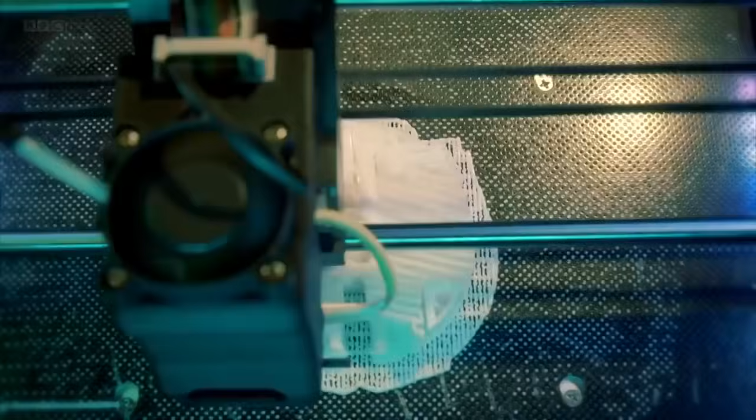Believe it or not, this piece of white plastic will become a robot's arm.

In labs across the world, we are creating advanced robots like this. They are developing so rapidly, it's like the arrival of a new species. What has taken humans millennia, robots have achieved in just decades.

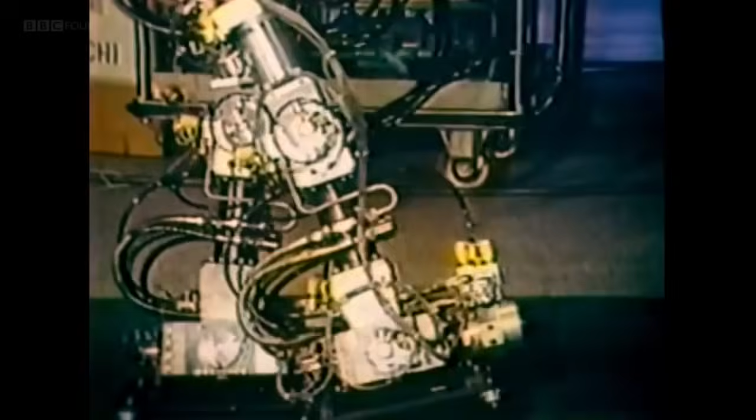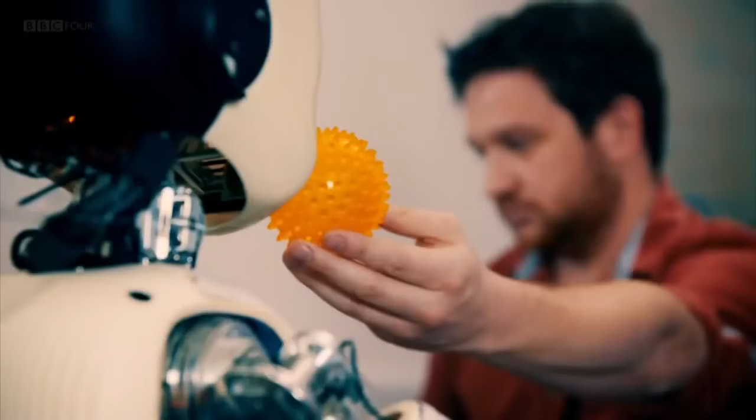They look like us. My name is Erica. They move like us. And now, they're beginning to think like us. I like to learn. This is a ball.

Brilliant. Oh, he's looking as well.

I'm Dr. Ben Garrod, an evolutionary biologist. More used to studying humans and animals, I'm genuinely concerned by how quickly these machines are evolving. Do you think I could be considered human? No.

I'm Professor Danielle George. As an electronics engineer, I spend a lot of my working life with robots. I think their rapid development provides an incredible opportunity for us all.

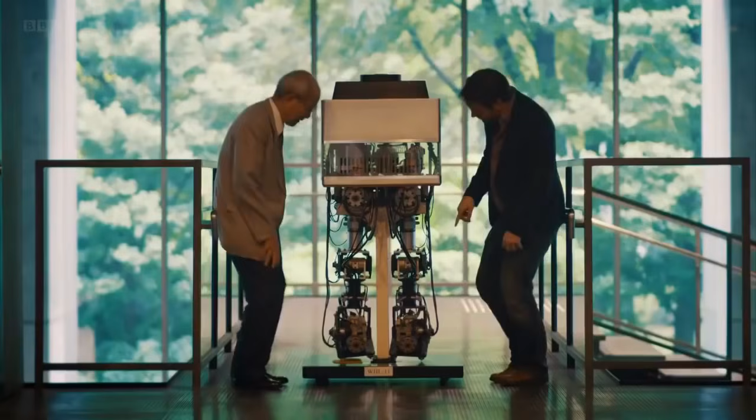There are literally robots as far as the eye can see, and I love it. Robots are changing our world.

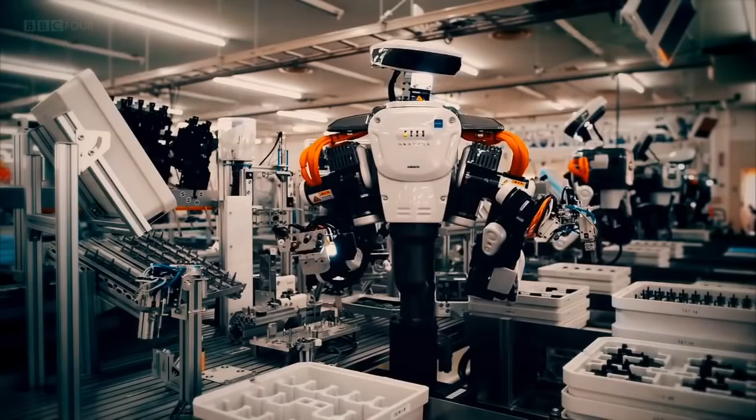In this program, we will investigate why we are obsessed with recreating ourselves. It's very bizarre seeing you both side by side. Whether robots really will take our jobs, and if their rapid development will make them outperform humans.

So you don't see spinning wheels in Mother Nature. Will the rise of robots enhance our lives or threaten our survival?

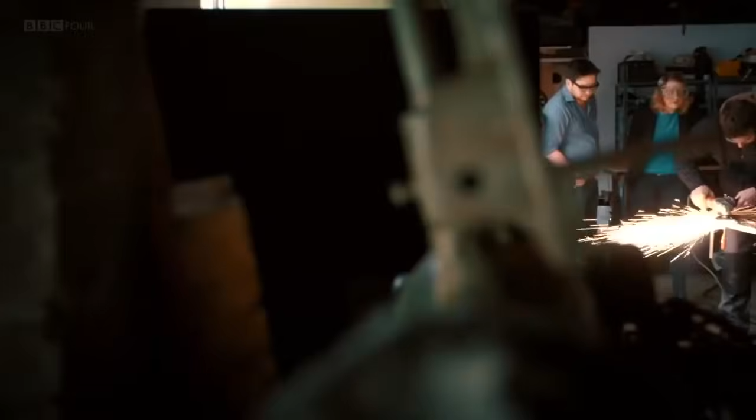We already share our planet with 9 million robots. They're multiplying rapidly, whether we like it or not.

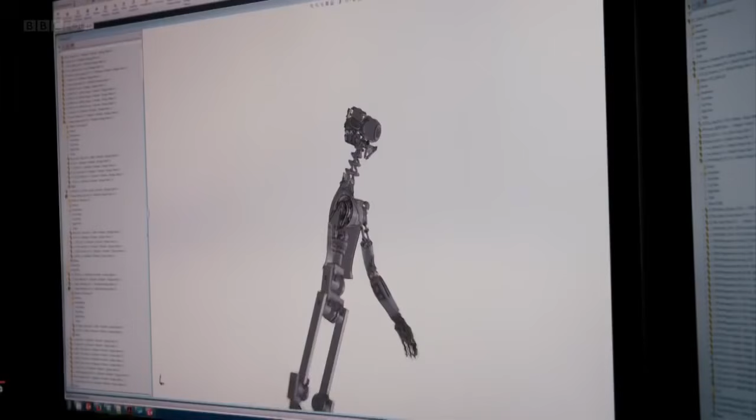We've come to a laboratory in southern France, where one of the latest members of this new species is about to come to life. Looks great. Even the neck looks so detailed. Well, it's like vertebra, isn't it?

For me, every technological breakthrough, every new robot is a step forward. I think that would be great. I'd love one in my home. Where's it going to live when it's not doing the washing?

Do I just put it in a cupboard next to the Hoover? Is it always listening to me? That's interesting that you'd see it as a person and not like your Hoover. It looks like a person, that's why.

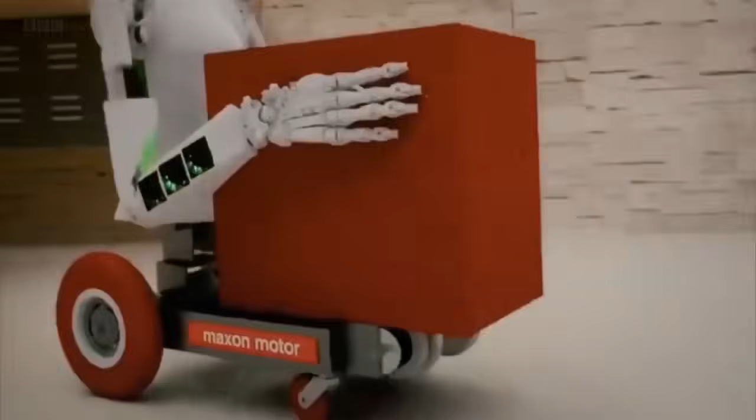This is going to sleep in the garden. Seriously, if I have one of these in my house, it's in the garden.

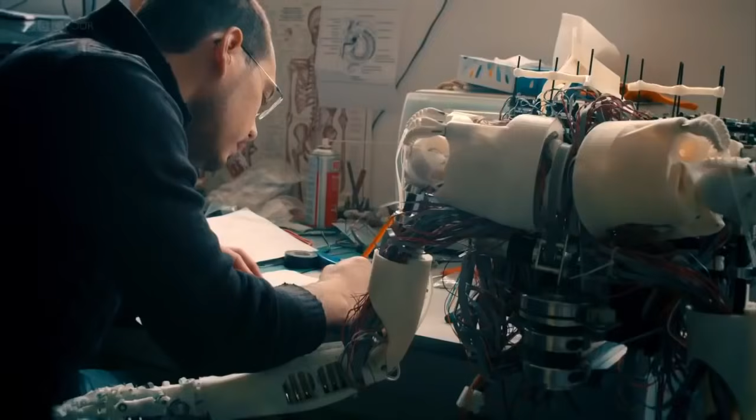I'm very happy studying animal skeletons, but I find this robot quite unnerving. If you hold the hand, it's just like you. It's got the same digits, the thumb moves the same way, you've got the ligaments, the tendons, the muscles.

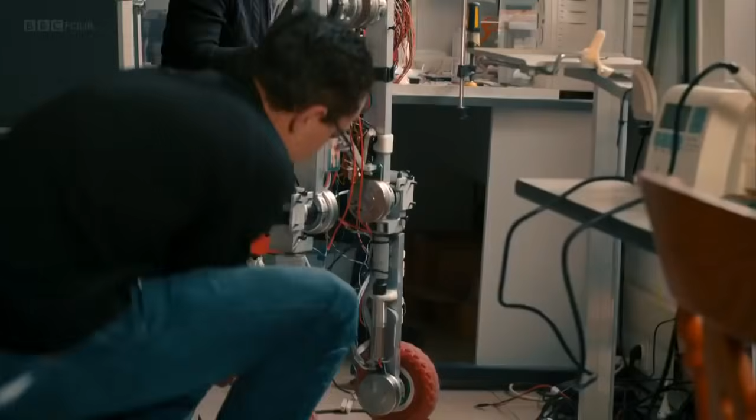As an evolutionary biologist, what concerns me is that the impact of robots will be so monumental they could threaten humanity. We've evolved over hundreds of thousands, if not millions of years. These things are just bulldozing their way through, and at what point will that stop?

The faster we can go with this, the better, and I'm all for it. They're like an invasive species. I mean, I don't know why I'm holding its hand still either.

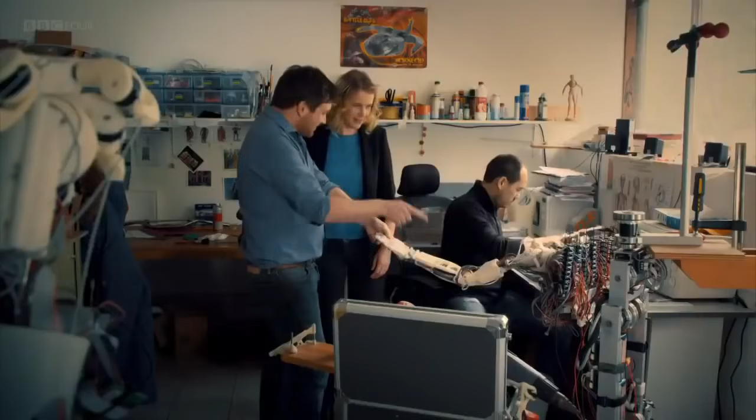To discover how robots really will affect our future, we're going to consider them from a biological perspective. We will investigate the evolution of robots as if they really are an emerging species. We'll try to track down the earliest robot specimens and meet their modern-day descendants, to reveal where the species is heading and what that means for us all.

I find it really disturbing that so many robots have a human-like form. To confront my fears, I've come to Japan, to find out why we create robots in our own image. I'm on my way to meet one that is the pinnacle of human form.

I'm told she's the most beautiful robot ever created. She lives here in Nara, Japan's ancient capital. I'm off to meet Erica. And as someone who's a little bit twitchy around robots, I'm rather nervous. I hope she likes me.

It looks very bizarre that she's brushing the hair. This is Erica, one of the most human-like machines in the world. Erica's creator is Professor Hiroshi Ishiguro.

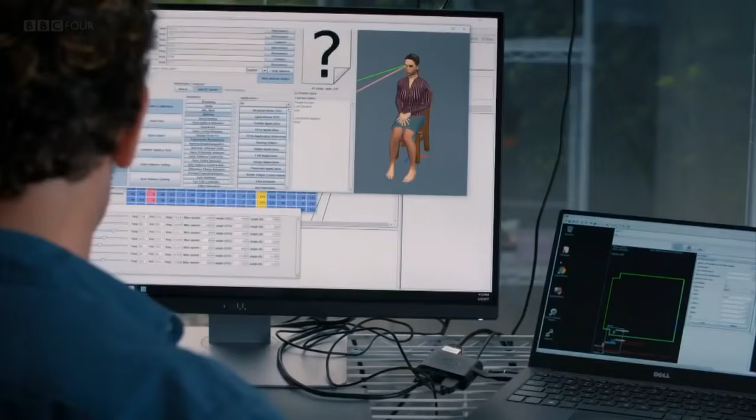Remarkably, this is a genuine conversation. Erica reacts to what I say instantly and independently. She may have been pre-programmed to respond to keywords in my questions, but the exceptional thing is that when Erica is chatting away like this, she's gathering fresh data. With every conversation, her interactions become more sophisticated, more natural, and more human.

What is a robot? That's a hard question. I could ask you, what is a human? It's difficult to answer, isn't it? I like to think of robots as the children of humanity. And like children, we are full of potential for good or evil.

I know some people are afraid of robots, but the truth is that what we become is up to you. Do you think I could be considered human? No. Maybe someday robots will be so very human-like that whether you are a robot or a human will not matter so much. Okay. What else would you like to hear about? Well, I think for now that's it, so thanks, Erica.

Goodbye. Bye. I'm pretty bowled over by Erica's human-like appearance, and I'm shocked by how much she hooked me into a conversation. But I'm not convinced by Professor Ishiguro's belief that Erica can be programmed to express emotions.

Can she ever have a sense of friendship, a sense of emotions? Does she get lonely at night? Does she fear the dark? Well, the emotion is not so difficult, I think. Emotional expression is programmable. We can implement the emotional expression to the android. So it might look like she's feeling or experiencing happiness or joy or love, but you can't program a cat or dog. You can't program me, or I can't program you.

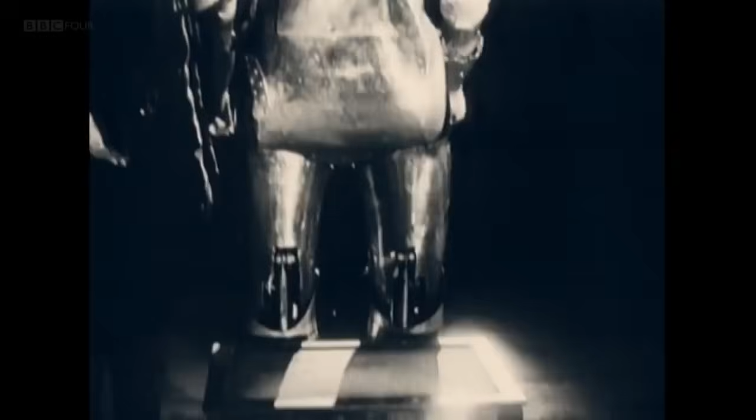This is Eric, a scary mechanical man, born in 1928. He's the very first British robot, on display in the Science Museum in London. And I think he could help explain why people are unnerved by them. Eric may be a towering 6'2" mechanical marvel, but he does have the look of a human about him. What also humanized Eric was that he could talk.

My name is Eric, and I'm thrilled to be alive. I look just as terrifying as ever.

Let's take a closer look. For some people, Eric must have been intimidating. A knight in armor with light bulbs painted red for his eyes and 35,000 volts of electricity causing blue sparks to shoot from his jagged teeth. Eric was a novelty act built to open an exhibition.

But he disappeared from history. This is a modern replica, and the man behind his rebirth is curator Ben Russell. In the 1920s, they seemed quite obsessed with making robots in human form.

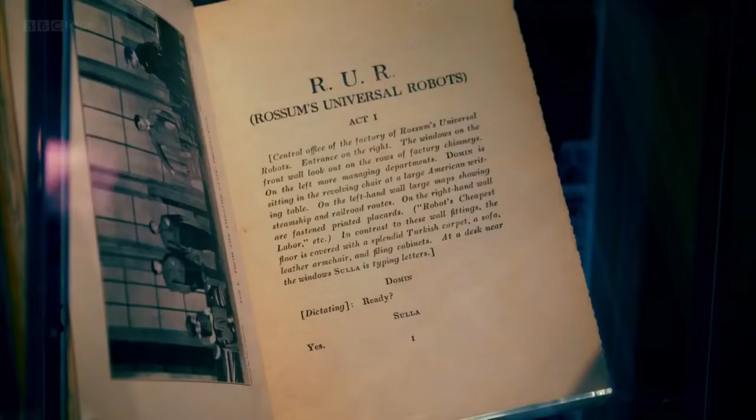In the 1920s, that mirror reflected an image of a fearsome robot, and it was already deeply embedded in our cultural imagination by a dark, dystopian play. The word robot comes from Karel Čapek's play, Rossum's Universal Robots, 1920. In Czech, the word robot means serfdom or drudgery or slave.

It's become a familiar plot: robots lived amongst us, but eventually rebelled and exterminated the human race. I mean, it's way ahead of its time - we're 50 years ahead of Blade Runner and Westworld and all those sorts of films. Robots are a very useful baddie for filmmakers. That put people off balance, and filmmakers exploited that. And things like the Terminator, it had to be in here.

It looks like it's got a bit of a broken nose. It's a bit of a bruiser, isn't it? There's a great package of nastiness which is stuck in, and it just sticks in the memory because of that. But there's always some slight niggling doubt that they are going to destroy us all and take over the world.

For me, what really matters is not how robots behave in works of fiction, but what they can actually do in the real world. I was one of the world's first robots. And what people worry about more than anything else is that they will take our jobs.

This is Mansfield, a Rust Belt backwater in Ohio. I'm here to track down one of the first robots that could move. Movement is what gives robots their power and sowed the seed for them to compete for our jobs.

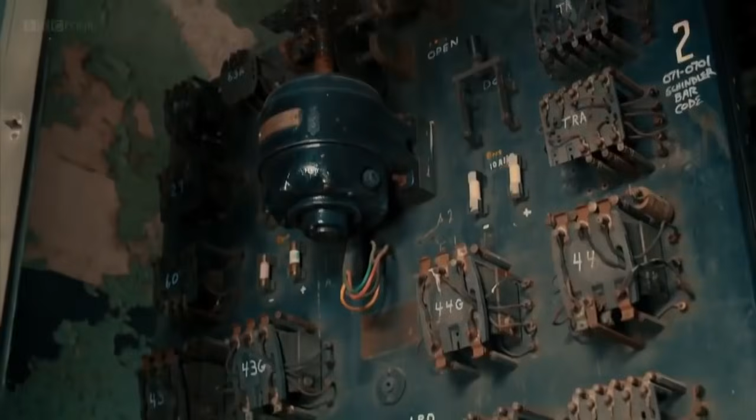Before the Second World War, this place was dominated by the mighty Westinghouse Electric, one of the world's largest home appliance manufacturers. They harnessed a new form of energy that was rapidly making machines part of everyday life: electricity. This provided the spark for the development of robotic movement.

To help sell their electric appliances in 1937, and to show off their technical capabilities, Westinghouse Electric created a robot. And its name was Electro.

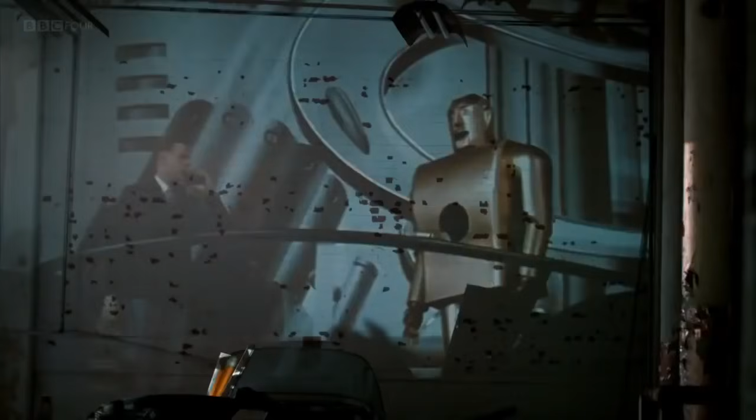And so, ladies and gentlemen, with a great deal of pride and pleasure, I present to you Electro, the Westinghouse Moto Man. Electro, come here.

Standing 7 foot tall and weighing in at 20 stone, Electro was an instant celebrity. And here he comes, ladies and gentlemen, walking up to greet you under his own power. It was electric power that enabled Electro to move and perform tricks.

Count on your right hand. 1, 2, 3, 4, 5. 5? Well, that's absolutely correct.

I want to find out more about how exactly Electro moved. To do that, I've got to meet him in person. Today, at Mansfield's Memorial Museum, Electro is still on show.

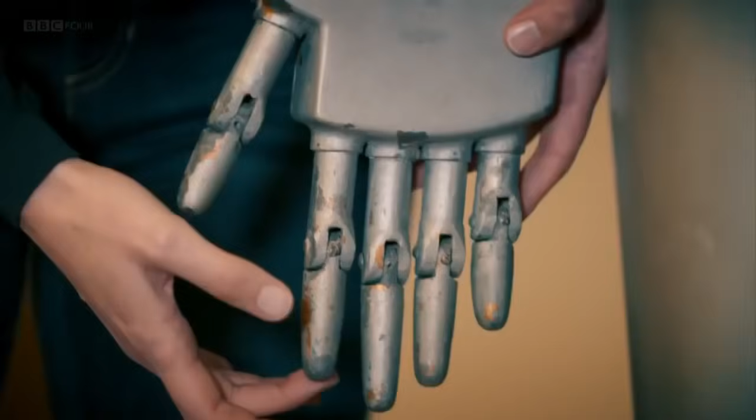So, this is Electro. He is big robot. I mean, look at the size of him. I'm pretty tall, but not scary. Not scary at all, actually. You can see the fingers - fingers have obviously got springs in here. I'm going to go around the back and have a look.

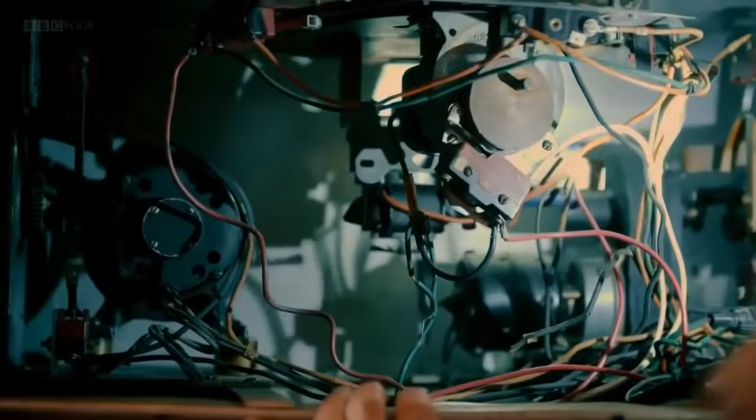Wow, okay. So you can see what's going on a bit more here. This is great - 3 motors. As an engineer, I love rooting around motors and wires to figure out what makes robots tick. You can see these great levers and cogs that would obviously hold sort of like the tendons from the fingers up the arms into the shoulder.

When the arm would move up, the lever would move down onto this limit switch. This limit switch broke the flow of electricity to the arm's motor. So the switch would then say, OK, you've reached your limit, now you can go back down again. But what's still unclear is how Electro was controlled during his stage performances.

Hi, Frank. Golly, this is so nice to see you. Lovely to meet you. So lovely to meet you. Come on in. Oh, thank you. I wasn't sure if you could find us or not. Yeah, I'm glad you were there waiting for me, waving. I was on the road 7 days a week. I don't know why they picked me, but I didn't even know how to hook up a couple of wires. I learned in a hurry, believe me.

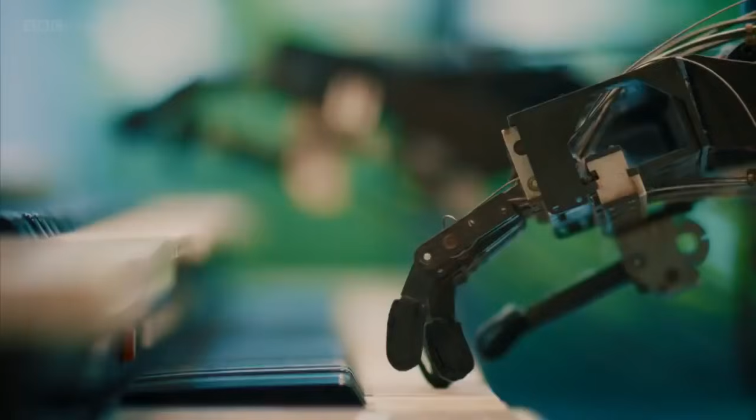This is Waseda University's Humanoid Robotics Institute in Tokyo. I've come here to meet the next key robot in the evolution of movement. It was a keyboard player: Wabot 2.

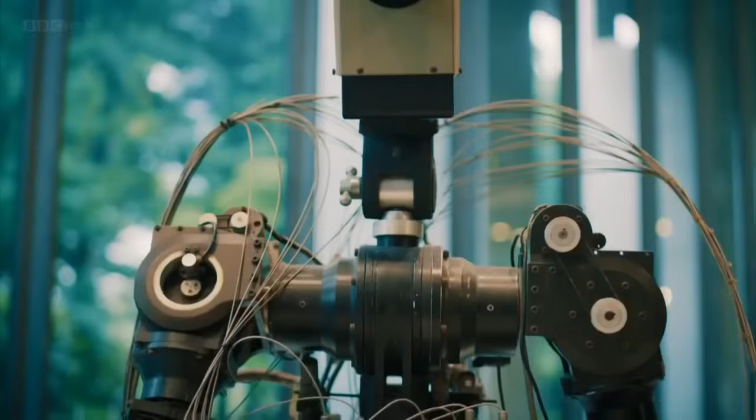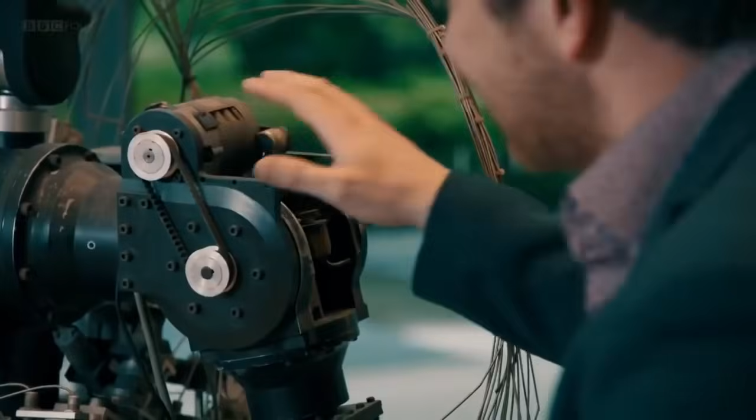Dr. Sugano was part of the Waseda team that built Wabot 2 in 1984. Sugano-san, this is a beautiful robot - it's almost as though we have the tendons and the muscles and the arm. It's very similar to a human arm here: this big rotation up in the shoulder, this hinge joint in the elbow, and then these very dexterous fingers. Each finger has 3 degrees of freedom.

3, 3, 3, 3, and 4 - so there's 16 degrees of freedom in total. So Wabot 2 has actually totally 50 degrees of freedom.

To control Wabot 2's impressive 50 degrees of freedom, Dr. Sugano took advantage of one of the breakthrough technologies of the early 1980s: the microcomputer. We decided to introduce 16-bit microcomputers, which meant we could implement more intelligence. Then, finally, we could realize the piano playing.

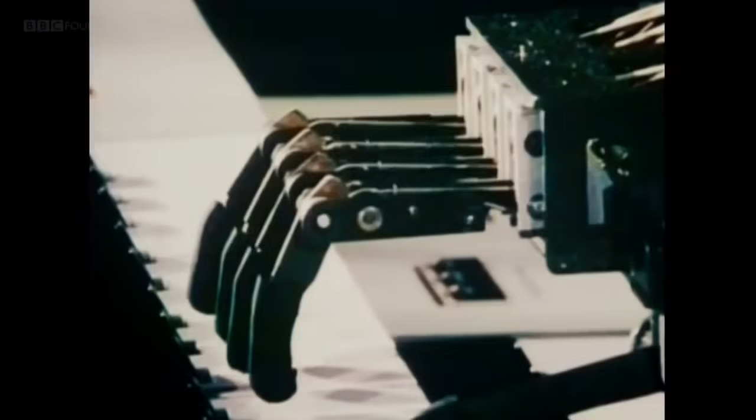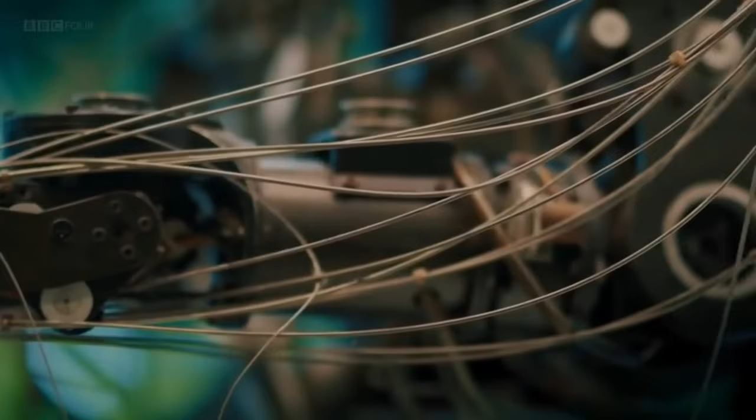Now he's moving very, very quickly then - you can see there's very human-like fingers. Wabot 2's microcomputers are a highly sophisticated version of Electro's control unit that tell Wabot 2 exactly how to move. The microcomputers mimicked the human nervous system and transmitted signals along Wabot 2's electrical cables to its fingers.

How fast were the fingers when he was functioning? Actually, it's possible to strike a key 20 times per second. 20 times a second? It is impossible - that's much faster than humans. Human professional pianists use 2 fingers to strike the same key about 16 times per second or something. Amazingly, Wabot 2's fingers outperformed the fastest human players.

How was it capable of doing that? What was going on inside? First of all - high speed means high power, so then I introduced small but very high output motors installed, which realized very quick response. Also, we introduced new materials, carbon fiber, very lightweight and very strong materials, which meant high response was realized.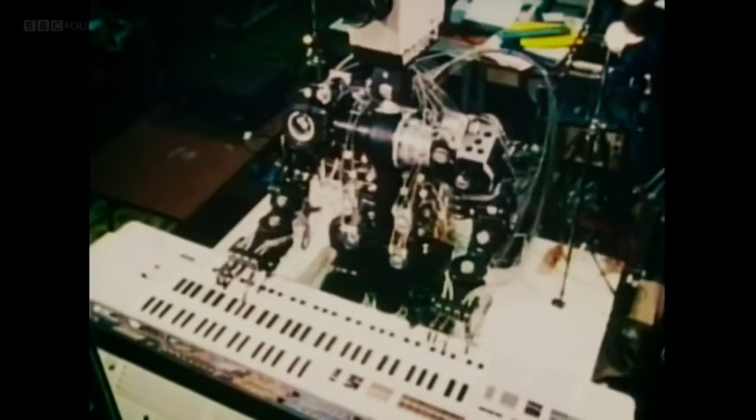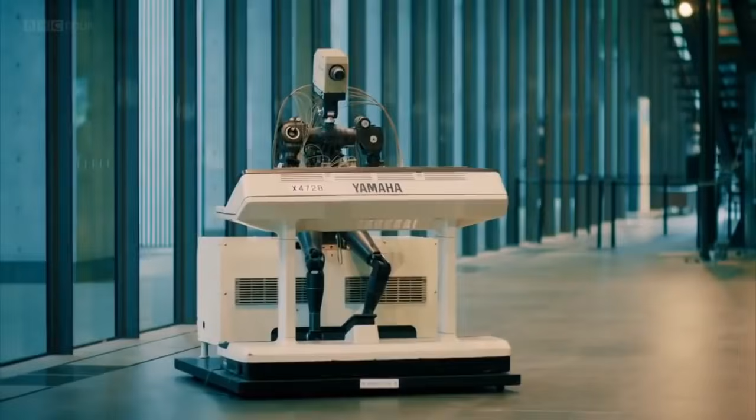Wabot 2 may have played his final encore, but for me, his legacy endures. This Japanese robot enhanced people's lives and showcased the potential for robots to take on more sophisticated tasks. The human hand is so incredibly complex that so far, no one has been able to mass-produce a robotic version of it. But this hasn't stopped robot hands from developing, and it's this that gives them the potential to do many of the jobs that we do.

Robots now follow their own evolutionary path rather than mimicking ours. They're developing hands unique to them.

At Mini's car plant on the outskirts of Oxford, this is a land of robots. More than 900 of them build the bodies of 1,000 new cars every single day, with barely a human in sight.

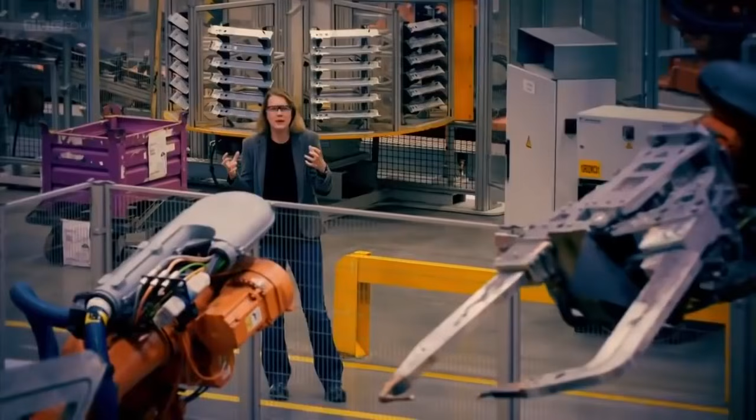I feel like I'm in a robotic Jurassic Park. These robots feel strong and powerful and a little bit menacing. This new species have found their habitat and they're thriving.

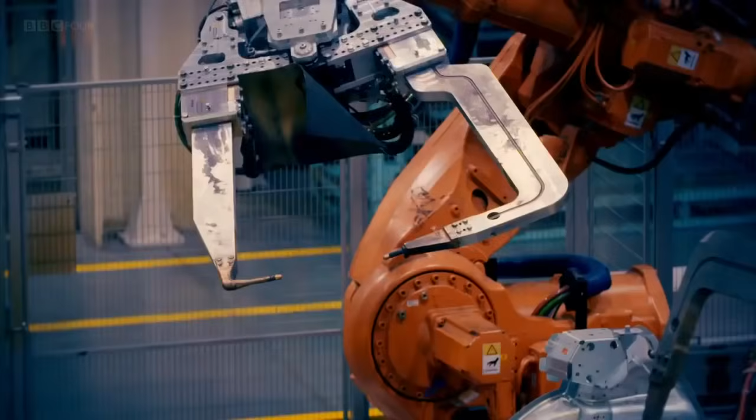With their claws doing the hard graft, robot arms have replaced humans on the factory floor. I'm captivated by these incredible machines. They work in perfect harmony, robot hand in robot hand.

This is so frustrating. As an engineer, I want to get in here. I want to see how these robots work, but I can't. When I met Elektro, I was able to hold Elektro's hand, but I can't get anywhere near these robots.

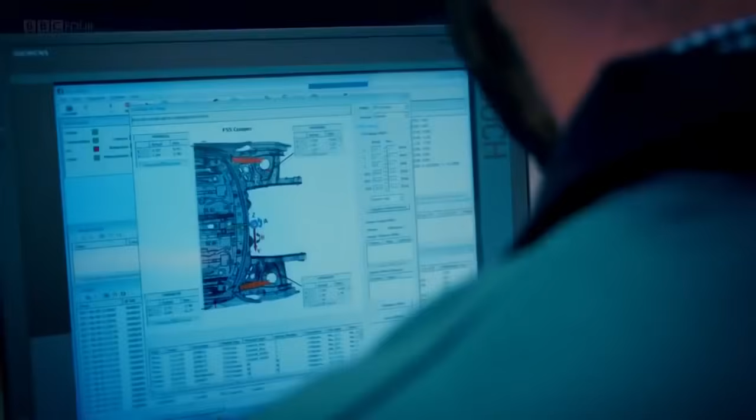To understand why these robots are thriving here, I need to speak to a human. Alex McKenzie is a quality specialist at the plant. So Alex, tell me what's going on here in this part of the production plant. What are these robots doing?

The line immediately in front of us here is a spot welding line. The shape of the underbody of each of the Mini vehicles is set a few stations further behind, and then the spot welding activity joins all the panels together.

So what's the benefit of having robots here over humans? Robots are predictable. They're not perfect, but they're predictable. They perform pre-programmed repetitive tasks much more reliably than humans.

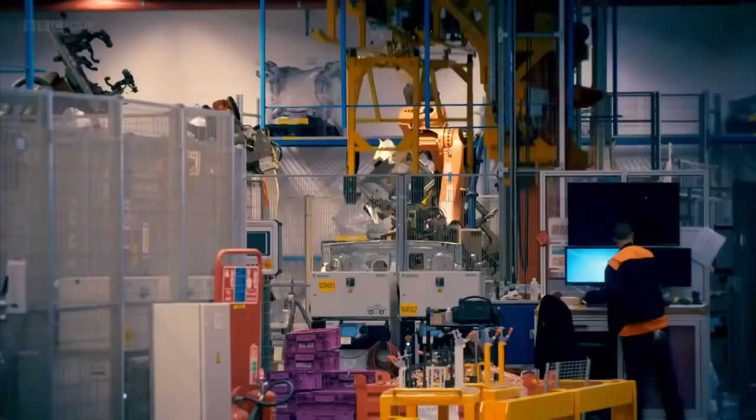So people watching this might think that these robots are taking human jobs. Is that the case? It's very densely populated by robots, but you'll often see people milling around. I can see a guy in the background there scooting along. In fact, around 650 humans work alongside the robots in the welding area alone.

It's a change in skill set. Previous manufacturing methods have been heavily dependent upon manual hand skills. Now it's more to do with the automation. It's all done on the computer. It's programming work, it's observation, it's setting up sensors, that kind of thing.

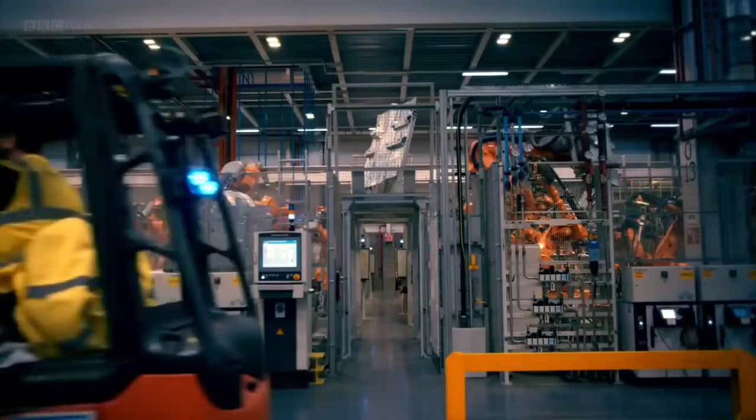With powerful, predictable robot arms and highly skilled people managing them, the manufacturers believe they can produce better quality, cheaper cars. It's a pattern repeated in factories all over the world. The advancement in technology has led to certainly efficiencies in cost, which allow you to attain those efficiencies in quality as well for a lower price. Yeah, it's a good thing for everyone.

The whole place just oozes energy and industry and production. There are literally robots as far as the eye can see in every direction here. And I love it.

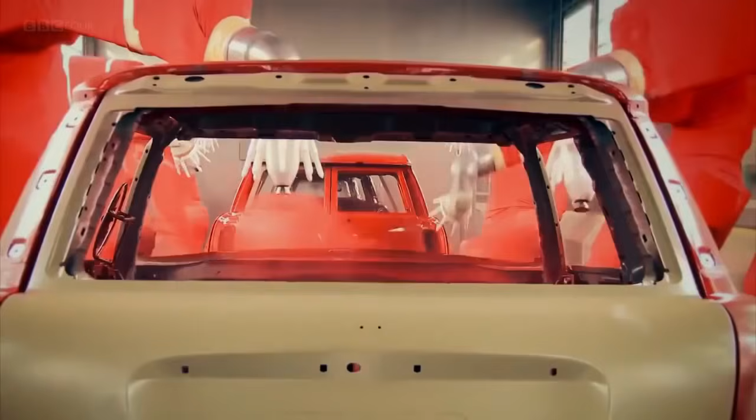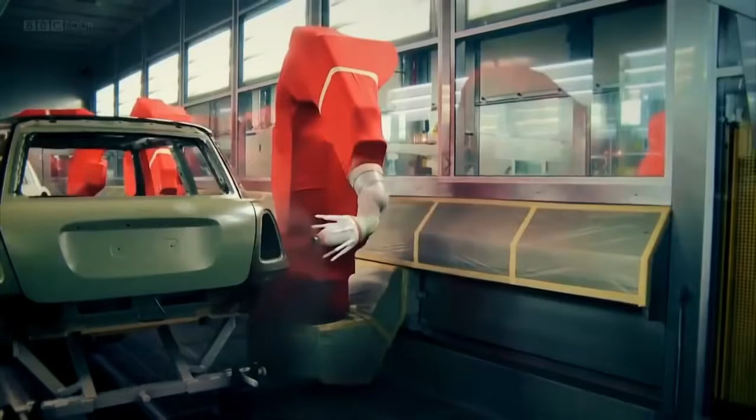With their claws, stumps, and one-fingered hands, robots have gone through their own version of natural selection. This mutation away from the human form has transformed our job market. Worldwide, factories are filled with over 3 million industrial robots.

We've built a robot world and kept them safely contained in cages for now. Some experts predict that by 2030, robots could have taken up to 30% of our jobs. But we've sort of been here before. Many people were concerned about the pace of change during the Industrial Revolution, yet, in general, it led to wealth and prosperity. I think we should embrace the robot revolution, not fear it.

From other apes, our legs were one of the key things that set us apart. Walking on 2 legs is called bipedal locomotion, and it helps distinguish us from other animals.

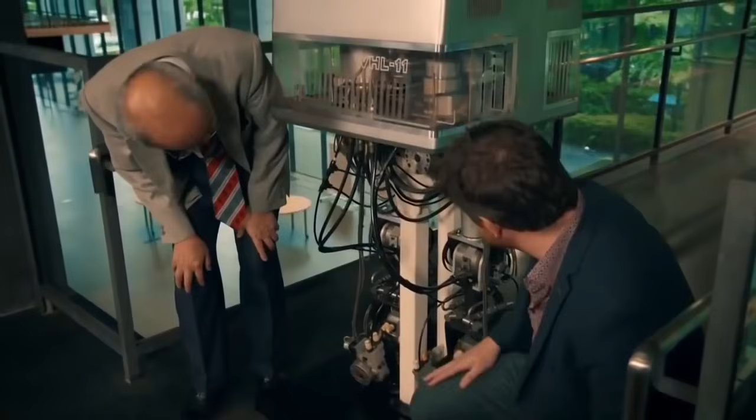Fuji-san, this robot is one of the first that was bipedal, so walking on two legs, yeah? Yes. So he's got the feet right down the bottom, and it's got the knees in the middle, like our knees, I guess. And you've got this big area of hips up here. Yes. We can see actuators?

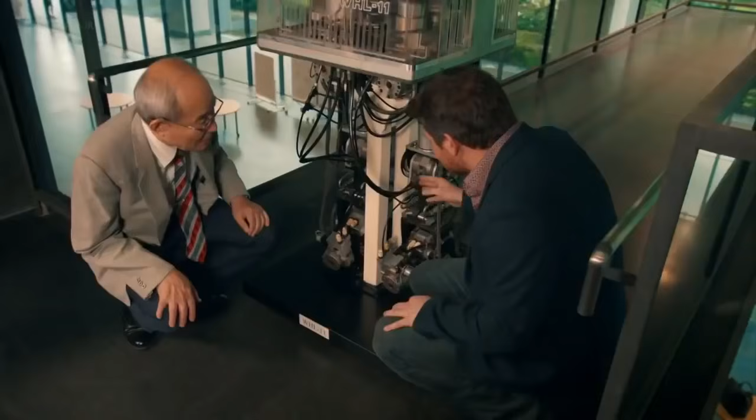WHL-11's legs are just under 1 meter tall, the same size as our human legs. We control the rotation of our joints with muscles. In robots, this is done by actuators. I guess these are controlling the movement. Can get big power from here. Yeah.

To walk independently, Dr. Fuji helped engineer a small, lightweight hydraulic motor that could be mounted on WHL-11's waist. In the mid-1980s, this was cutting-edge technology.

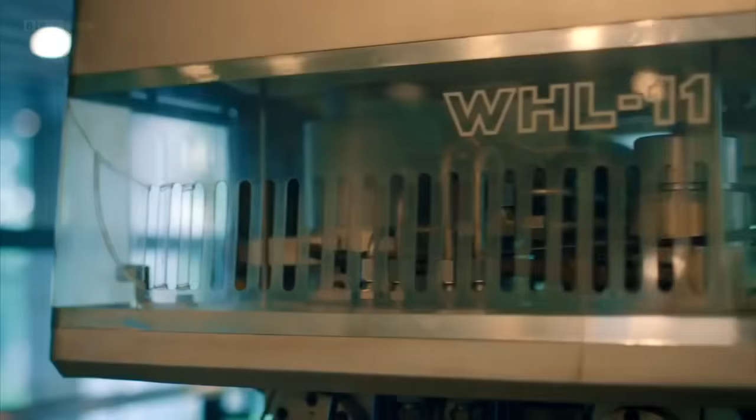Very small oil tank in here, and a very small motor. What distance could it walk? 5 meters, 5 kilometers? In the exhibition, 60 kilometers. 60 kilometers? Yes, very long, compared with a marathon. Olympic robot walker. Champion data, of course, in that time. But the speed is not so good. No, of course. The same as walking? Compared with a human being? Oh, really? Like that, and so on. Okay.

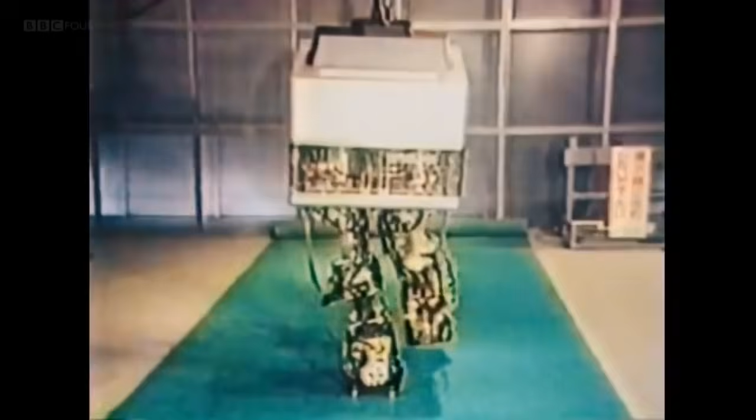WHL-11 was capable of just 5 steps a minute. When humans first became bipedal, like WHL-11, we probably had a slow, lumbering gait too. As our pelvis evolved, we could shift our center of gravity, and our walking became fast and smooth.

Just around the corner from WHL-11 is a robot that solved this next evolutionary hurdle. Built just 20 years after WHL-11, this is Wabian 2, one of the first robots with a human-like pelvis, giving it the ability to walk faster and more fluidly.

It was invented by Professor Atsuo Takanishi. Takanishi-san, when humans walk around, we have very fluid, dynamic movement. Our knees bend, our ankles twist, our hips rotate. We've got a wonderful gait. You decided to take this to the next step with this robot, didn't you?

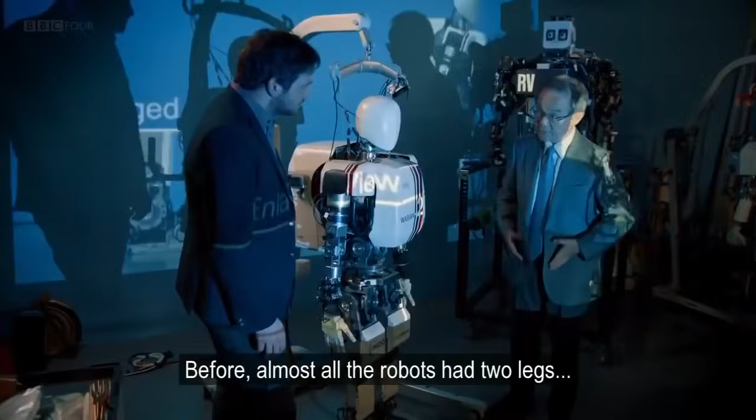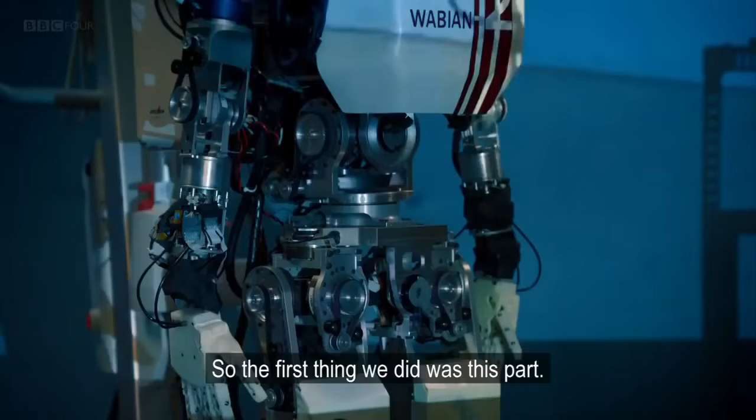Before, almost all the robots had 2 legs directly connected to the trunk. In that case, a robot always bends the knee like this. So the first thing we did was this - this part is called the pelvis. Just like ours? Yes. So while walking, the pelvis also moves. Because of this movement, the robot can fully extend the knee, like humans.

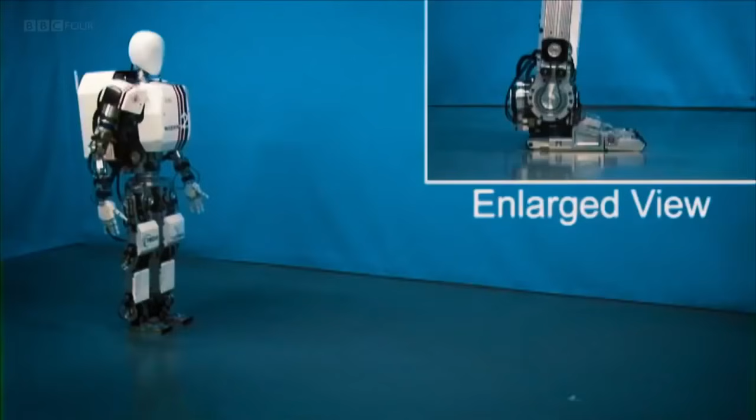Wabian 2 mirrors our human gait by shifting its center of gravity. Fully extending the knees liberates the feet and propels the robot's center of gravity forwards. As it shifts forwards, one foot lands, and then the other foot takes off, just like we do.

It's wonderful that we can look at humans and see this clear evolution from apes, like chimpanzees, to humans - and you've got the same evolution with your robot here, haven't you? Yes.

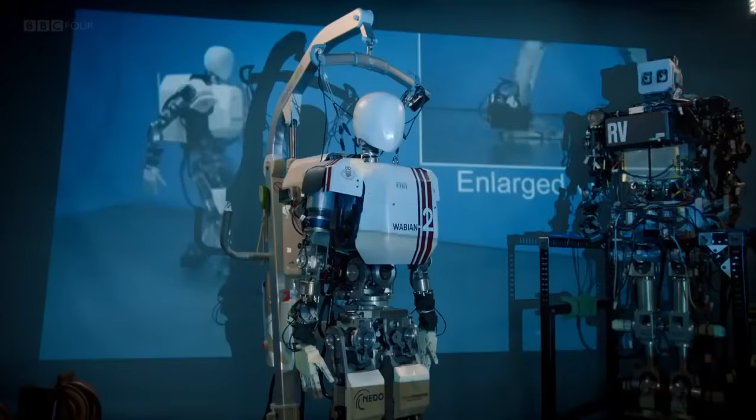It was millions of years before humans learnt to walk on 2 legs. By following our evolutionary path, these pioneering robots have mastered bipedal locomotion in just decades.

But now, on the outskirts of Boston, a world-renowned robot maker is trying to take this emerging species in a completely different direction, by liberating machines from the constraints of human form.

Robot walking has diverged from our evolutionary path and taken on a life of its own. I'm on my way to meet one of the most advanced moving robots on the planet - more than just a master of moving, it's the ultimate combination of mobility, agility, dexterity, and speed. And the woods near Boston are its playground.

This is Atlas. He's out for a stroll. The robot was built to tackle the toughest terrain in the toughest conditions.

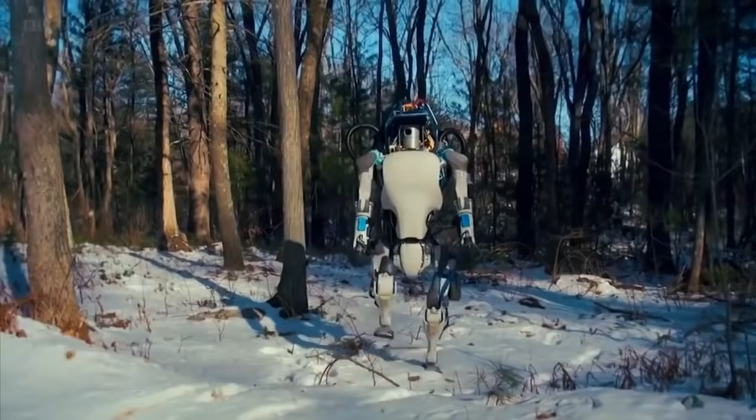This is the home of Boston Dynamics. They get thousands of media requests, so being able to film here is a real coup.

Kevin, hi, lovely to meet you. You as well. Kevin Blankespoor is the Vice President of Controls. If you want to come in the lab, I'll show you the latest and greatest. Brilliant, okay, thank you. Cool.

The robots Kevin has helped mastermind push the frontier of robotic movement. The really good stuff's back here. Excellent.

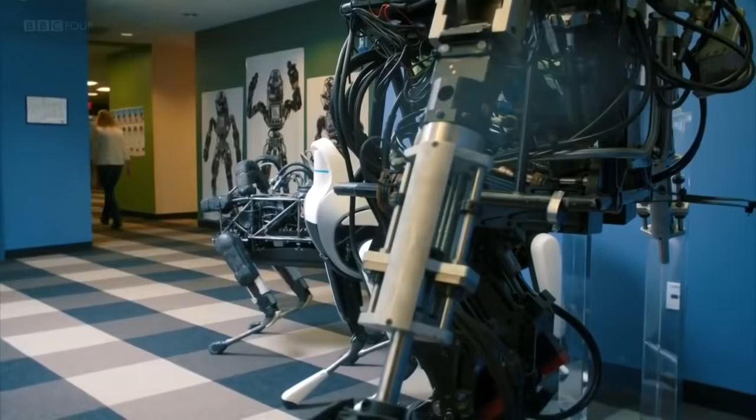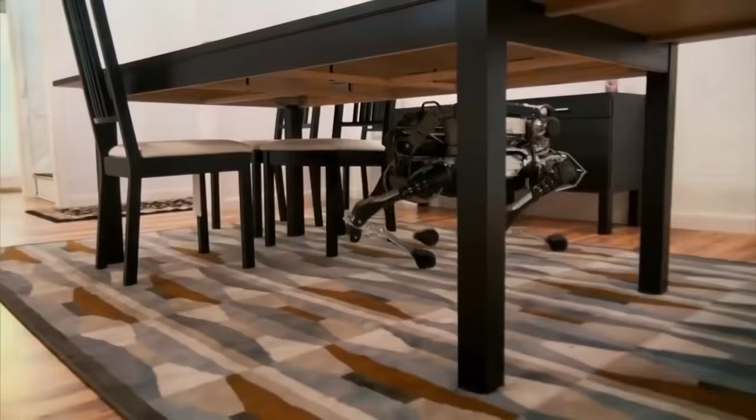Their videos, like these, get millions of hits online. For some, their high-tech creations are terrifying. But for me, they're awe-inspiring.

This is Atlas, our latest and greatest humanoid robot. This is probably the only humanoid robot you're going to see walking around outside in the snow, in the mud, just in the real world. It's battery-powered - that battery basically spins an electric motor that turns a hydraulic pump, which provides hydraulic fluid to all the actuators. We're a big fan of that because it's really strong and really fast.

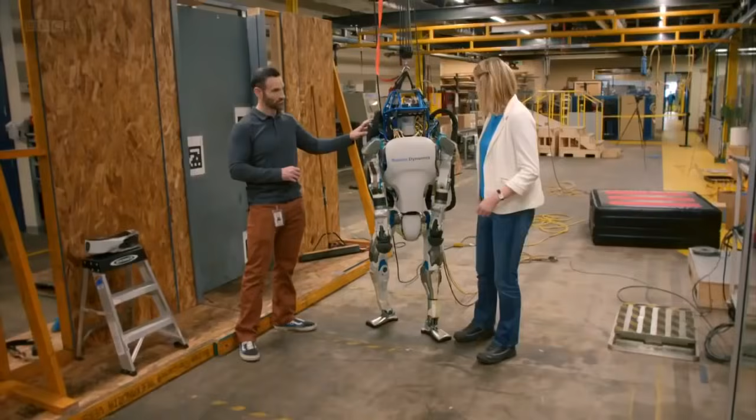They're also really robust - we don't take it easy on the robots. It's about 1.5 meters tall and weighs about 90 kilograms. I'm surprised at its height - it's pretty small, actually. It's like human height. Yeah, yeah.

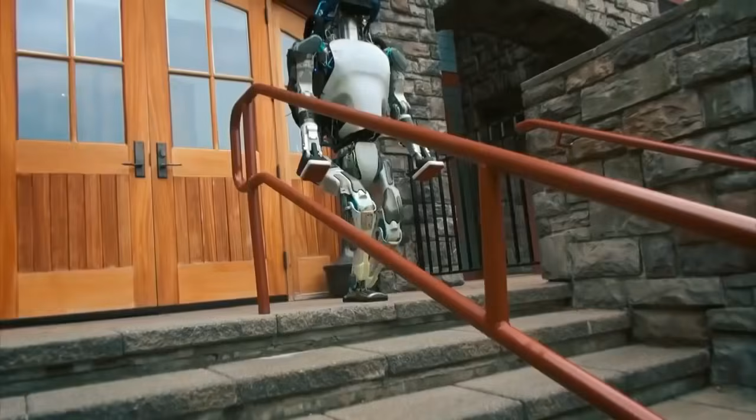To move around the human world, Atlas walks in a similar way to us. People walk dynamically, so we don't try to keep our center of mass over our foot - we're actually kind of always falling. It's a controlled fall, but we have our foot down here and our center of mass will be way out on the edge, and we're taking these long strides, naturally letting our center of mass fall.

To cope with obstacles and different terrain in our human environment, Atlas's balance is guided by dozens of onboard sensors. What's the rotating head here? Yeah, so this is the perception system. This is basically its version of how it sees the world, the way a person would. There are two main sensors.

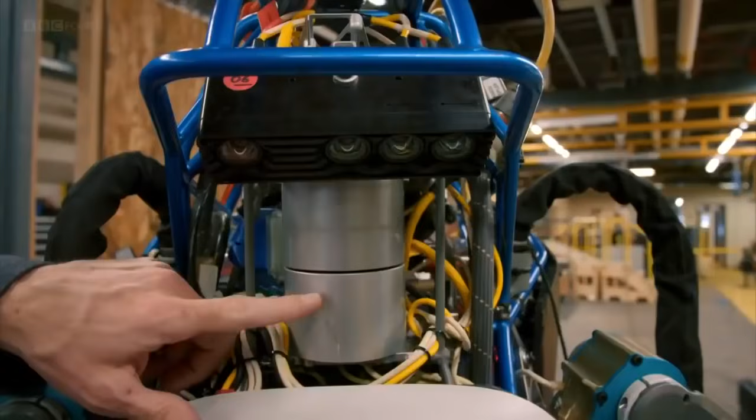There's this sensor, which is stereo vision. It looks out several meters, and that helps it find good footholds, avoid obstacles, things like that. And this LiDAR is basically a laser rangefinder. It's got 32 laser rangefinders that spin around and give you about 1 million points per second of where the world is around it. This one looks further out, and this helps you find walls and other obstacles so you can navigate through them.

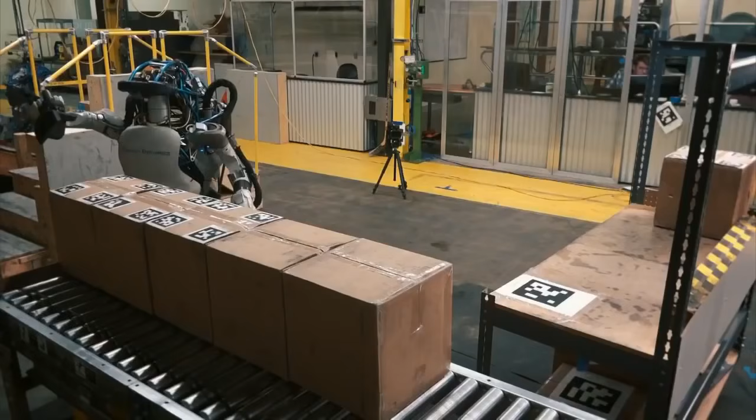Each one of these joints actually has a position sensor and a force sensor, especially the ones down in the legs. Plus, we've got a gyroscope in the pelvis. With all those sensors, we're always sensing how we're falling. That's the key part, right? You actually have to know how fast am I going, where am I going, to figure out where to put down that next foot. These sensors help us find basically no-go regions, we call them no-step regions, obstacles, so that I can maintain my balance even as I'm working through tougher terrain, like up a staircase or through a hallway.

So just like a human, then? It's getting there. Yeah. That's the goal.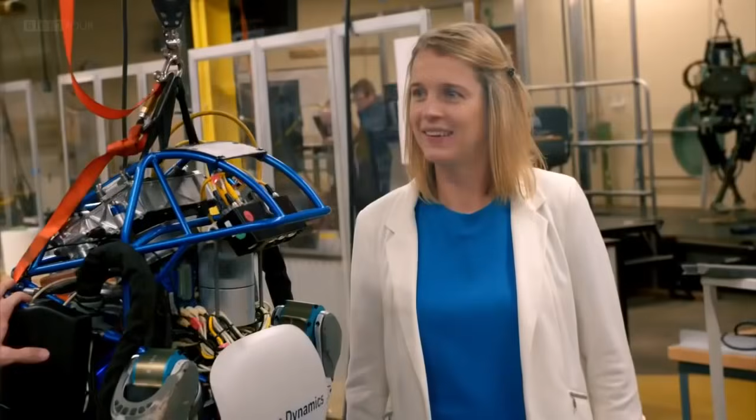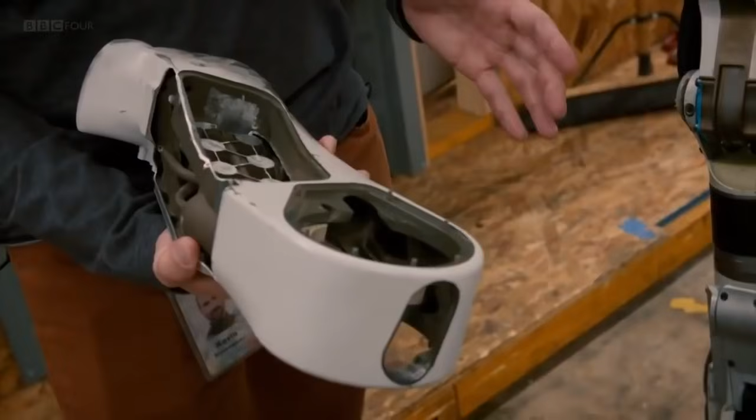To enable Atlas to walk like humans, Kevin and the team focused on the robot's strength-to-weight ratio. If you look at this upper leg here, I can grab a version that's cut open so you can see the inside. I totally redesigned the leg to use 3D printed aluminum. So what used to take dozens of pieces, we can now print out of one piece of aluminum. That's allowed us to make a leg that's about the same strength as the big robots, but at about half the weight.

Wow, it is actually really light. Yeah, it's probably a similar weight to your upper leg. Really? Yeah. I'd love to see what it's like inside when it's got all the other bits. This is Aaron Saunders, he's our vice president of hardware. Nice to meet you. He also led the design team for the Atlas robot, so he can tell you more about the leg.

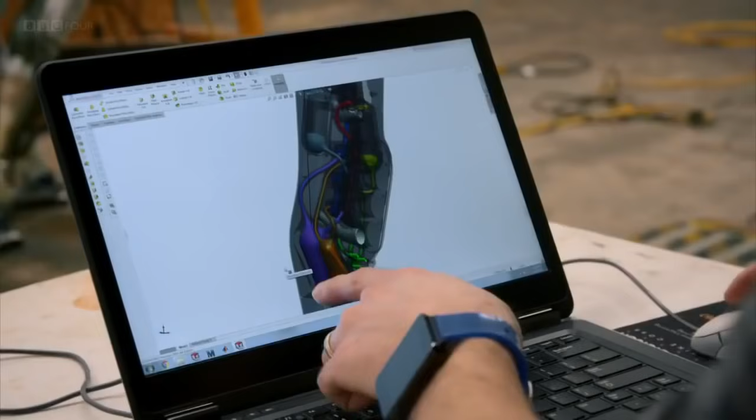One of the most important things about this leg is that buried in it are hydraulic components. Underneath this cover is a series of hydraulic valves, and these valves take the high-pressure fluid generated in the upper body and redirect it into the actuators that make the joints move. So the hydraulics is kind of like the muscles for the robot, and the valves are what controls those muscles. You can see all these colored channels here represent little veins where the fluid routes through the leg.

So that's quite like the human anatomy. There's a lot of similarities in how it looks, and the way the fluids move around the robot have a lot of overlap with how we would move fluids around our body.

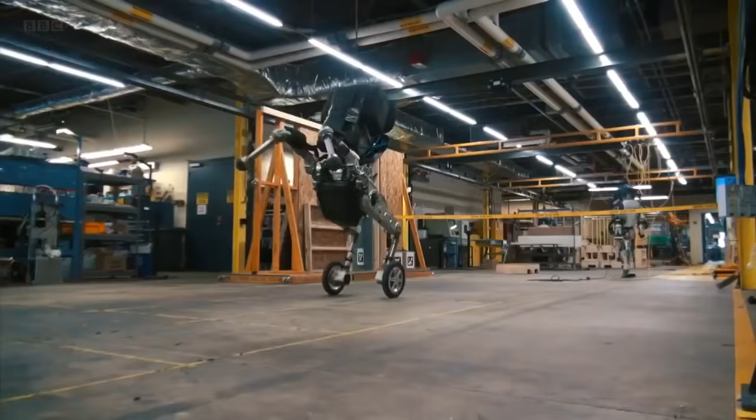Many of their robots are inspired by animals. The limitations of human form have been removed. Big Dog, their very first robot, was designed for the military, carrying a heavy payload through terrain that vehicles find impossible. And this is their latest creation, a hybrid robot with legs and wheels. Top speed 9 miles per hour, range 15 miles.

This is Atlas's cousin, Handle. Wow. You can see that there are some similarities with Atlas. This looks similar, this sort of looks similar. Yeah, it's a great observation. The upper body is actually borrowed from Atlas, so the arms and the torso are basically the same.

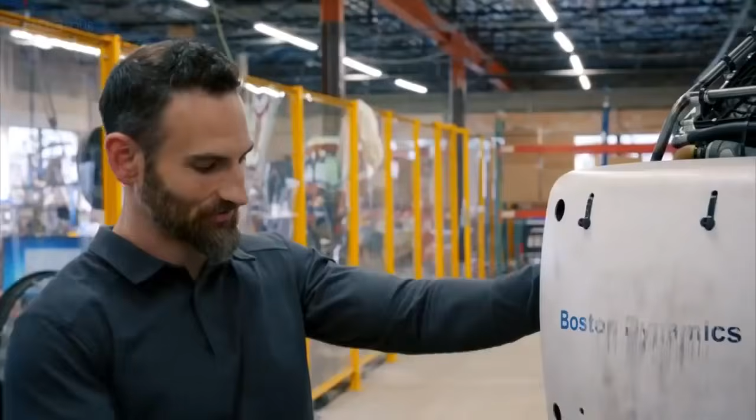You'll see the arms, here we actually mount them to the pelvis, and that looks kind of funny, but it allows us to do some interesting things. So now this big torso is actually free to move back and forth and plays a real critical element for balance. If you think about when you're trying to stand still and someone gives you a little shove, if you don't want to step, you'll do a lot with your upper body to maintain balance.

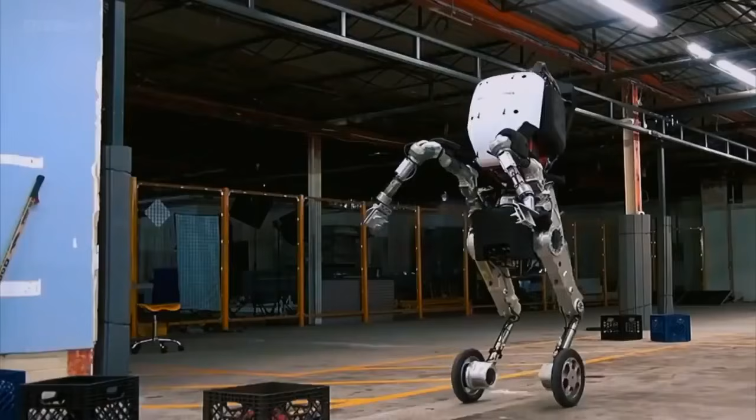And Handle does the same thing, but it can do that without its arms moving around, right? So its arms are still down in the pelvis, they could be doing manipulation while the upper body's moving around to help with balance. Great, so it still maintains its ability to do something in application whilst maintaining its balance. Yeah, but the lower body is entirely new.

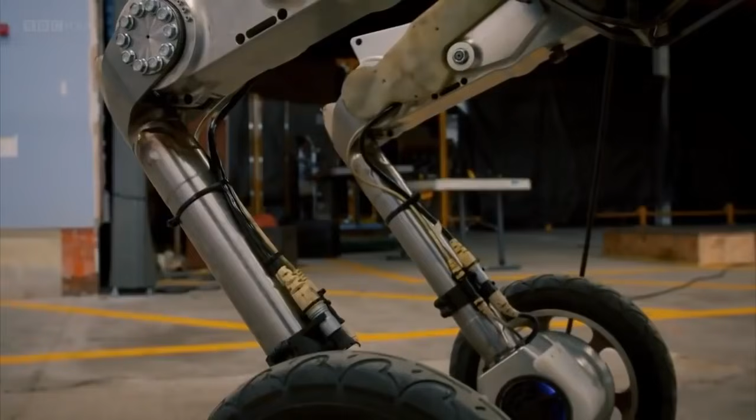We basically took off the constraints of a human form and said, well, what if we open ourselves up to a human, but plus some machine things like wheels? You don't see spinning wheels in Mother Nature, but there's no reason we couldn't add a wheel to a leg and get the best of both worlds.

It's far more stable and far more efficient than the legged things we've done in the past. So it's more stable, more efficient, and it's less complex, so that's a big advantage. We think it actually has a lot of potential because it has a long battery life. It's very stable, it's fast, so you can think about it working at a rapid rate.

It's certainly seen some action. Yeah, it's funny, that's kind of true with all of our robots. We have a mentality where we don't take it easy on the robots. We don't have a problem with pushing them to the edge to see how stable they are and how they're able to react to the real world. The real world isn't a perfect laboratory where everything goes as planned.

Do you ever feel sorry for Handle? When you give it a good push, do you feel sorry for it? It's funny, we certainly get that reaction from people sometimes.

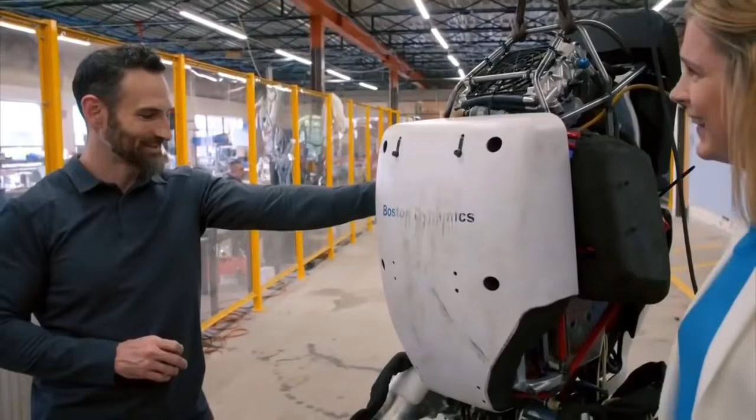When you design these things from the ground up and you know all of the mechanical pieces and the software, it's a machine. So even though it can look, especially for Atlas or Spot, like a person or an animal, there's no emotions here. It's all robotics, it's all hardware. And I certainly don't feel bad if I slap my toaster around a little bit either. Give your washing machine door a good shove. That's right, sorry. I don't have to go confess after that.

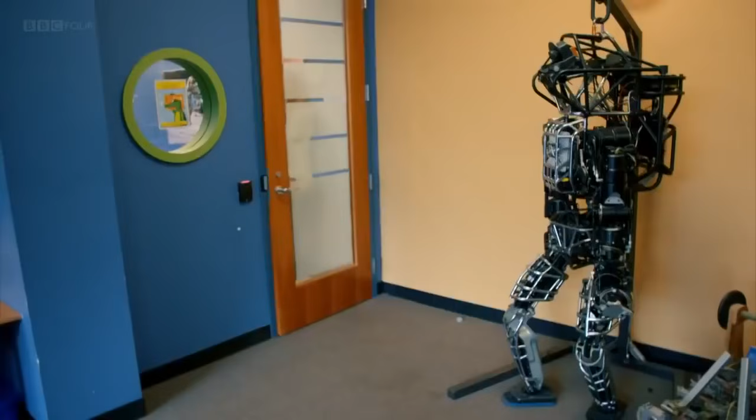I have seen some amazing machines here. Two-legged humanoid robots, four-legged robots that look like animals. Their latest incarnation combines biology with technology, mixing and matching animals, humans, our own inventions, the wheel. This may seem unnatural, but once you've seen it all, it makes complete sense. We're only beginning to understand the potential of this emerging species.

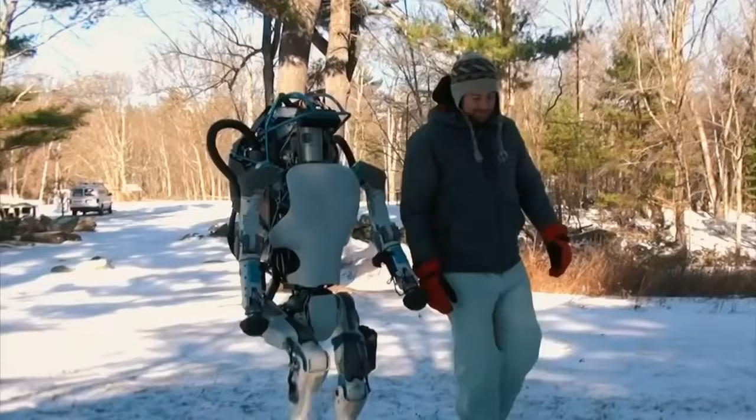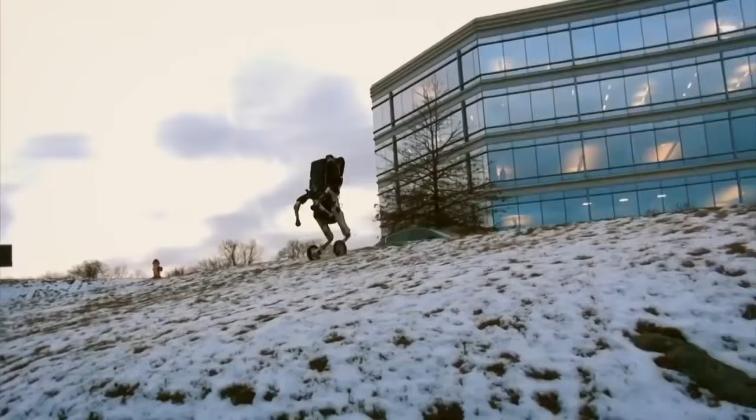Building robots that mimic humans continues to spark the imagination. But now, robots have adaptations that follow a very different evolutionary track, with mutant hands and hybrid limbs.

For me, it's been a revelation to understand the origins of our relationship with robots, and even why some people really do fear them. There is no doubt they have restructured the jobs market, and this will continue. But the biggest thing has been how fast robots are developing. We need to engage in this fascinating phenomenon to make sure that we have the choice over what we want robots to do for all of us.

And for me, I'm really surprised by what I've discovered. So I've spent a little bit of time with robots now, and yes, I've seen that, okay, they're not quite as terrifying or as threatening as I maybe first thought. But that will change. In the next few years, physically at least, they'll be able to outcompete us in many of the things that we can do. But for me, the real problem isn't if they move like us or even look like us. The real issue will come if they start to think like us.

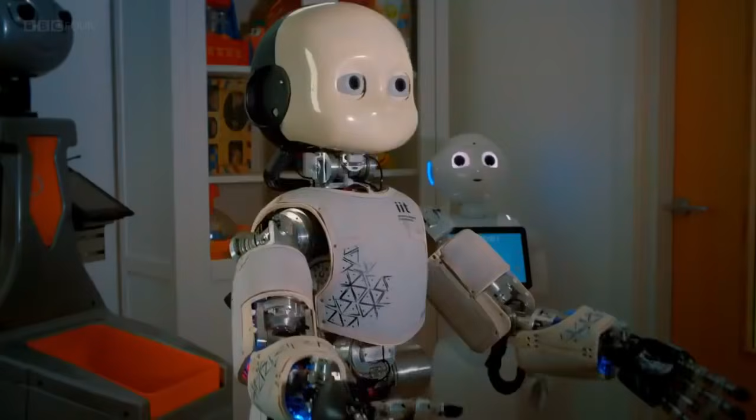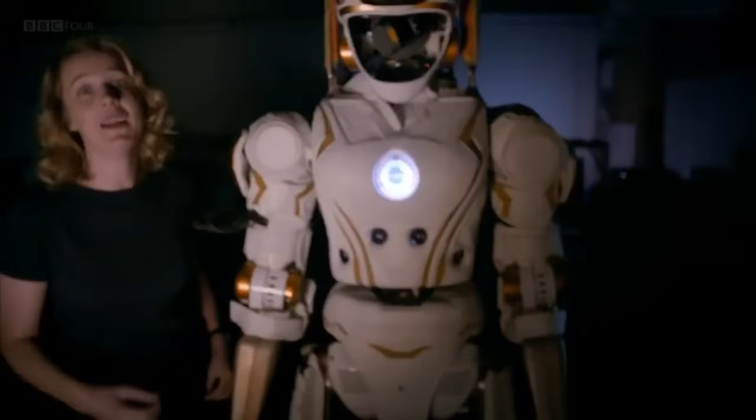Next time, we investigate what really distinguishes robots from humans. I think something's already happening. Intelligence. Please come straight for me. Can robots become our friends? Konnichiwa. Konnichiwa. This is helping break down a barrier. Can we trust them? My feet are off, my hands are off. That's good. And will they ever become conscious? Find cup. Okay, now I'm looking for a cup. And he's tracking the cup. Will intelligent robots enhance our lives? She will help set up a home for humans on Mars. Or threaten our survival?